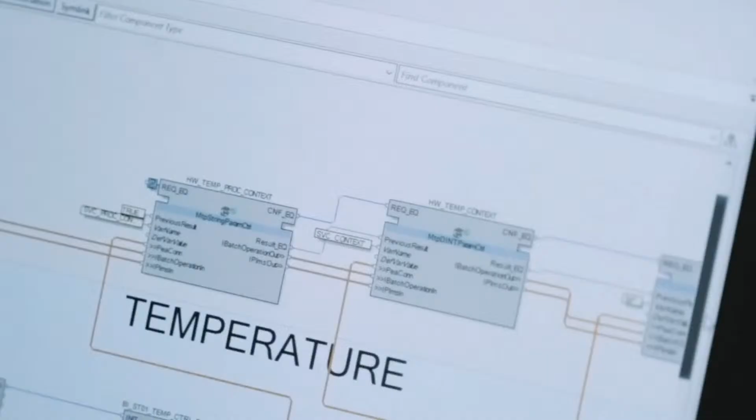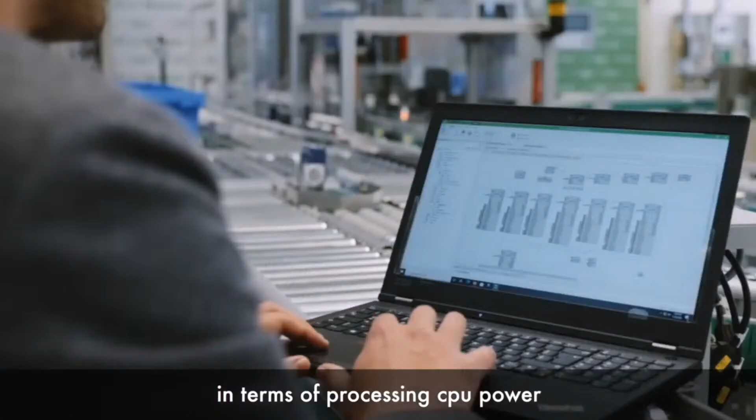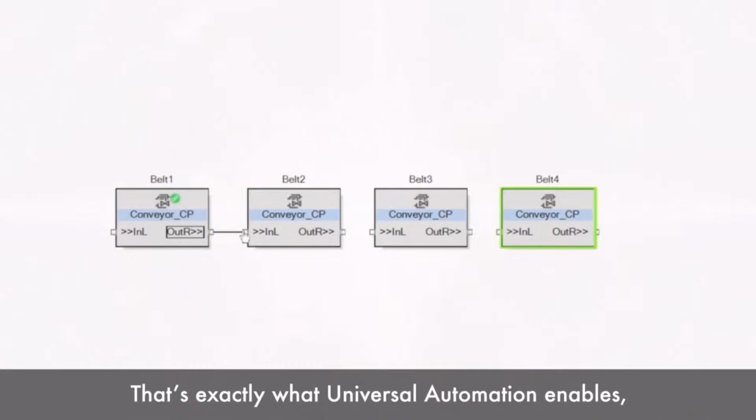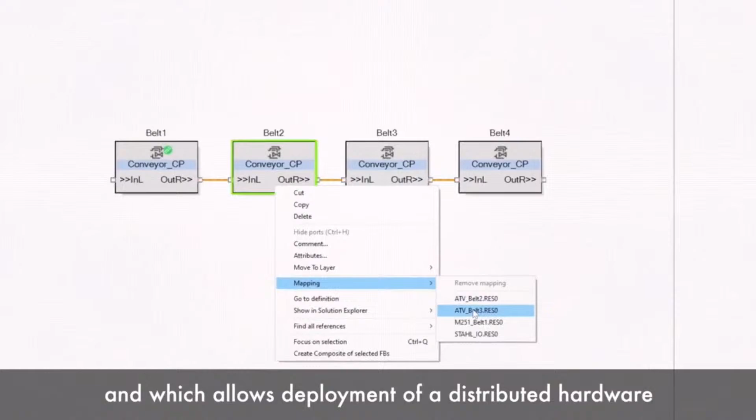universalautomation.org is about sharing a technology, a shared runtime execution engine. We call it a game changer in automation because we have the first technology based on IEC 61499, the standard which aims at decoupling hardware and software. Hardware itself is becoming very performant in terms of processing and CPU power, and the future is more about software. This approach is really a winning approach because it's very flexible. You develop the application once and you can reuse it in each different configuration. That's exactly what Universal Automation and 61499 enables, because it brings a new formalism for developing software which is object-oriented in nature and which allows deployment on distributed hardware for the actual final control system. So let's say it's a marriage made in heaven.

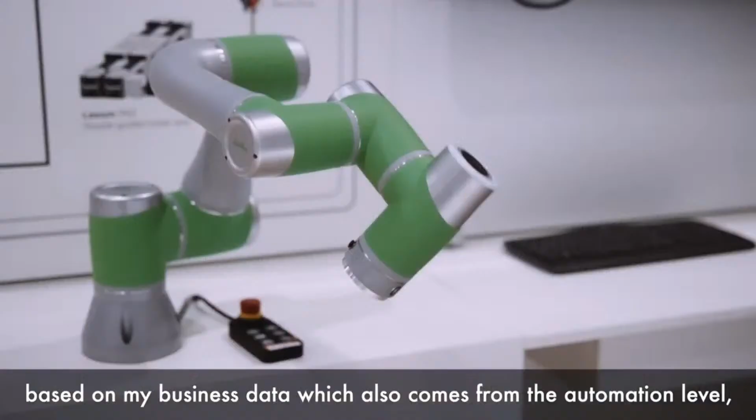If I want to make more conscious decisions based on my business data, which also comes from the automation level, I need universal automation to get this data in an efficient way and with the right engineering effort at the level where I can run the analytics.

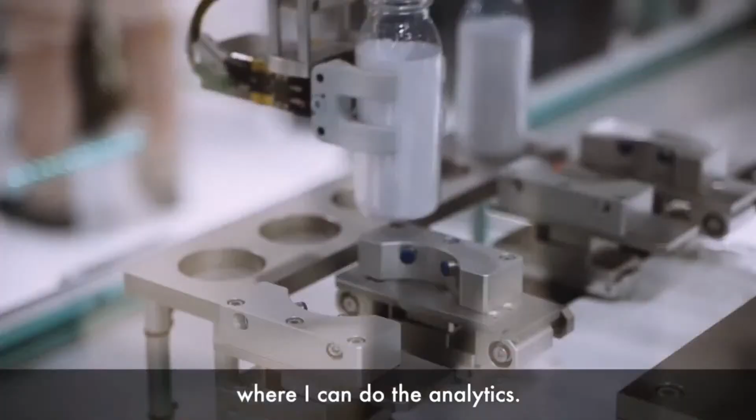Offers are available, not just from Schneider Electric with EcoStruxure Automation Expert, but also from Advantech, from Stahl, from ESA in Italy, and from other companies.

Advantech is growing really, really fast. And I believe if you want to keep on growing in the future, you need to be able to innovate. And when I see the universal automation approach, it is exactly the way of innovation we need to go with.

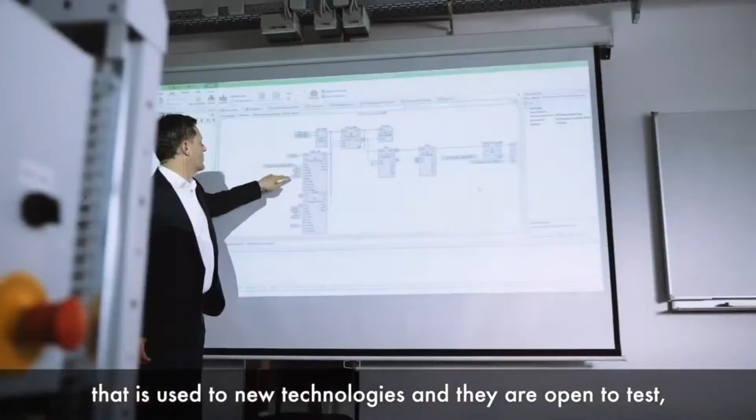Most of our customers from process automation are pretty conservative, so never change a running system. But now we see a new generation coming up, who are used to new technologies, and they are open to test and try these new functionalities. And I think most of them understand the advantages of this pretty well.

I've been doing this now for 20 years, and I think over the years, this is the most exciting change. From my experience, I see that in IT, for example, there has been a big revolution. And I expect the same in automation. I don't know when it will happen. Probably it takes a little bit of time, but probably a revolution will come.